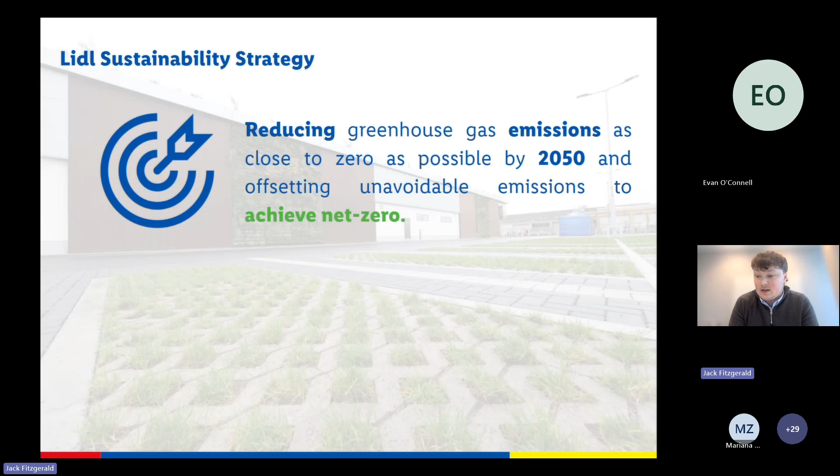Then the key objectives of the project - future-proofing for future EU legislation in terms of the Energy Performance Building Directive and the move towards zero energy buildings. We wanted to use Maynooth again as a test bed here, take the learnings from it and be well equipped for these changes when they come further down the line.

And reducing energy consumption and cost. As a discount retailer, energy consumption costs is always something that's at the front of our mind - how we can make those costs leaner, but keep the stores operating as efficiently as possible. We wanted to use Maynooth here; again, we made updates to building services to see what we could take and roll out across the wider network.

Awareness is obviously going to be a key objective of this project - awareness through project partners such as the Irish Green Building Council and also the BRE group. We want to continue to reinforce Lidl's position as a market leader when it comes to sustainability, and again this is going to be done through our project partners here.

And then education. Obviously we wanted to use Maynooth as also a learning base as well, be that for suppliers, other contractors, developers, and even the wider public, which I'll get into a bit more later on, which we've done through our community garden, which gives details on the building that you can see as soon as you walk onto the site.

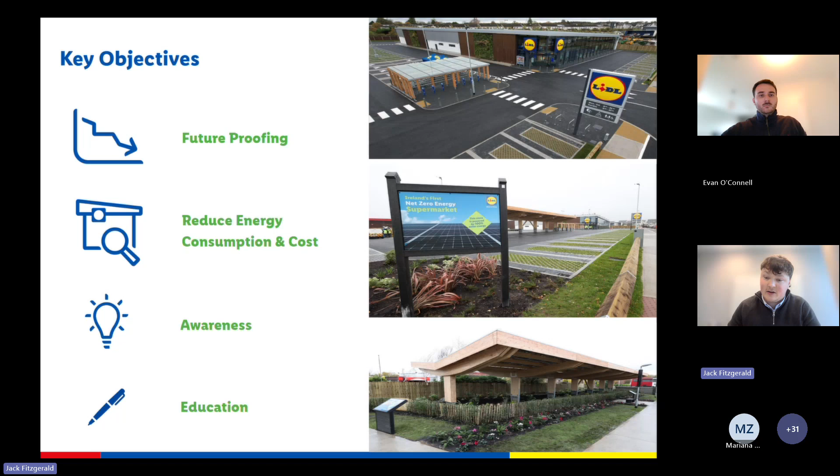Okay, so a bit more background on the project. We started this project in roughly 2020, so almost 6 years ago now. At the time, there was no definition for net zero energy construction in Ireland. There had been a number of definitions over the years through the likes of the World Green Building Council, but these allowed for a very wide range of offsets, including the purchase of green electricity.

So with that in mind, we decided to partner up with the Irish Green Building Council to get their third-party validation and get them to define the scope for us going forward. The definition we came to in agreement with them was all operational and embodied carbon, and offsets only for embodied carbon must be genuine offsets.

So the operational carbon is the carbon to run the building day to day, such as your refrigeration, your lighting, etc. The embodied carbon is the carbon produced to realise the store, through your building materials and methods. Then the offsets - like I said, there was a wide range of offsets through the World Green Building Council and other definitions over the years.

In Maynooth, we wanted to keep the offsets genuine. So what we've done is actually create carbon insets - we've retrofitted a store near Maynooth with PV as well, to offset the remainder of the embodied carbon that we couldn't offset with the store build itself.

So the structure then, the external team. Lidl Ireland has been the primary driver of this. We were closely affiliated with our own Lidl International and Schwarz Group parent company as well - they're obviously project stakeholders here also.

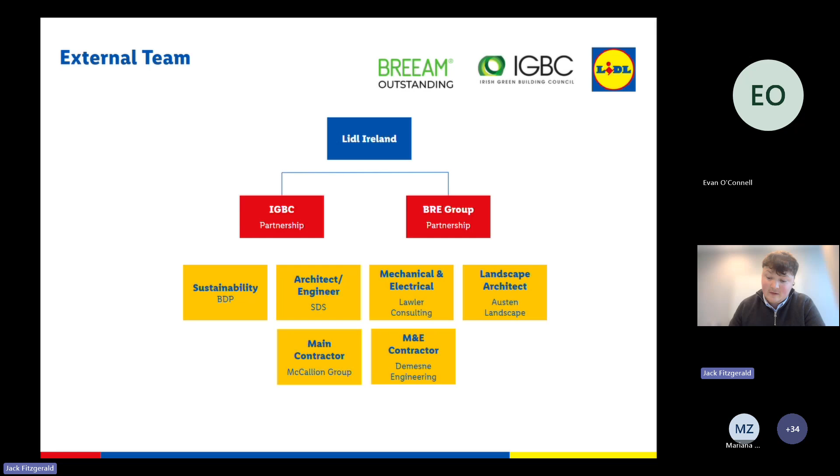So I'll start off with the embodied carbon. When we started this project, we had to build a baseline and understand exactly what our embodied carbon benchmark was for a standard store. So we had a life cycle assessment carried out on a standard store, and what we found is that a typical Lidl store was already performing very well in terms of embodied carbon.

So I've listed the standards set by the UK Net Zero Carbon Buildings Standard on the right hand side. The reason I'm referencing these is because, similar to construction regulations, the Irish standards, when released, are predicted to follow the UK Net Zero Carbon Building Standards very closely for the commercial and retail sectors. So we found that Lidl was already outperforming the 2030 target there at 535 - we were closer to 440 kilograms of CO2.

So with the changes we were able to implement in Maynooth, we brought this closer to the 2040 target - we're within about 320 to 330 kilograms of CO2 in Maynooth at the moment. So again, we were able to make a significant decrease there in the embodied carbon of 26%. But again, it just shows we're already outperforming the standards that were already set.

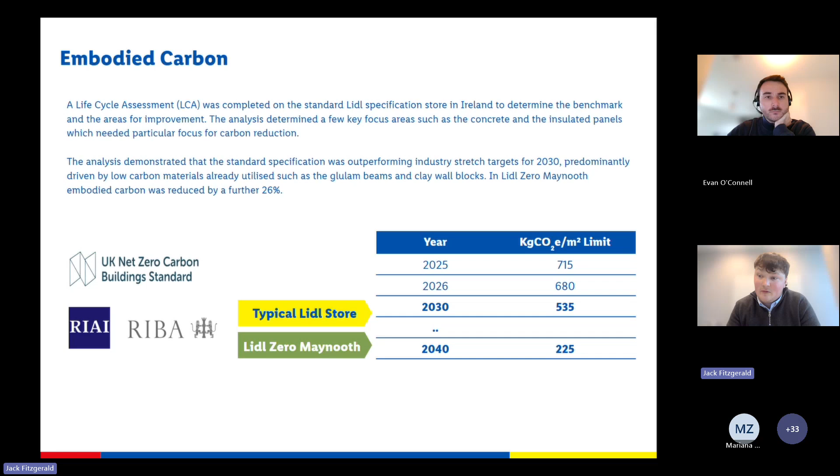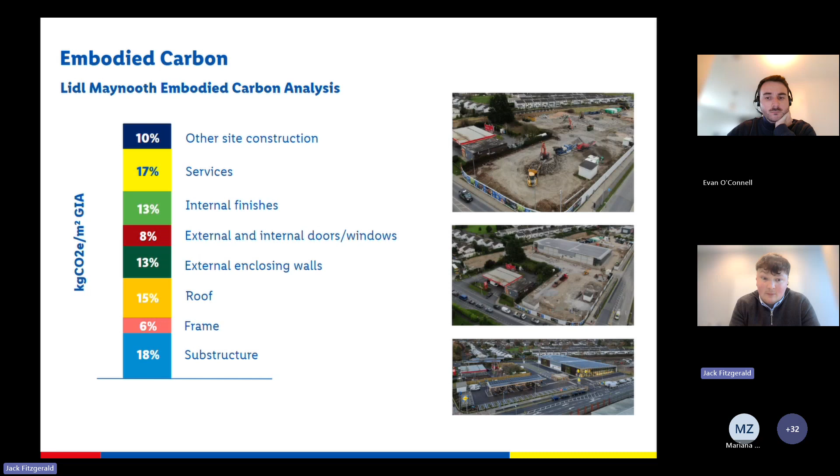We want to continue to focus on being better and reducing this further. As part of the life cycle analysis, we had to analyse every element of the building structure. So we started off looking at the substructure and the percentage of embodied carbon taken up in the store, going through the frame and the roof. We were able to pick out some of the bigger hitters and identify key areas we could go after.

Looking at this key element breakdown, the roof panel included in the standard store was a PIR insulation panel. The manufacturing process for these is very carbon intensive. It includes a couple of sheets of steel manufactured either side of the PIR insulation. So we identified that as an area we could focus in on.

Through our suppliers on the project, Kingspan, we were able to implement the lower embodied carbon roof panel range. At the time this wasn't something that had been released to the market, and they also wanted to use Lidl as a test bed for themselves. So we got their early buy-in and saw significant savings of up to 21% in the roof panel and also the wall panels, which were the same type of PIR insulated panel.

For the building structure, we had the Poroton blocks, a clay block we use in our standard stores with very high insulating qualities and quite low carbon output compared to concrete blocks or steel frame. We looked at all these options to see if any change should be made, but found they were already outperforming the standards by using the Poroton blocks, so we continued to use them here.

What we did do in this case was increase the thickness of them. Typically we use a 365mm block; we increased this to 425mm. The reason being to reduce heat losses through the building, because we want to retain as much energy within the building as possible, so that the building services don't need to work as hard going forward.

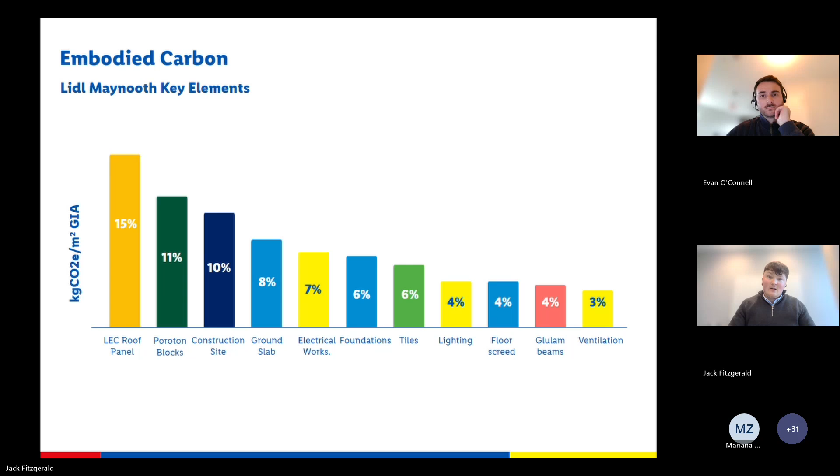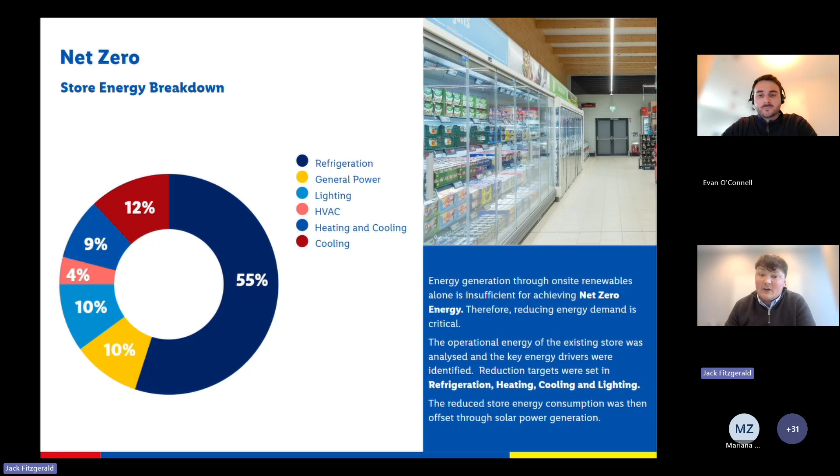Having looked at the embodied carbon, next up was the operational requirements for the store. Similar to the embodied carbon strategy, we had to build an operational strategy - establishing your benchmark and working your way down to see what improvements can be made. We picked a couple of standard stores and analysed them, finding that refrigeration was the biggest hitter in terms of consumption, alongside general power, lighting, HVAC, heating and cooling. These were all items we looked at to see what changes could make them run more efficiently and reduce consumption in the store.

So through that, we developed this energy waterfall, or strategy. We looked at the items we could reduce the energy store usage from, and we found that we were able to make a reduction only to a certain point. That wasn't going to get you to net zero. And this is where your renewables then come into effect.

In a standard store, we typically include 200 kilowatt of PV solar panels on the roof. In Maynooth, we've included 575 through the roof and the car park. So we over doubled the size of the PV array here in order to get more solar usage in the store and reduce the energy consumption.

We also included a battery in Maynooth, which was first of its kind in terms of a retailer doing this in Ireland. It was the first time we'd done it throughout our stores. This was able to make use of the high production times for the PV - it can go to the battery, be stored, and then released at nighttime to make use of the cheaper nighttime rates.

Finally, something we'd never had experience achieving before: we found we could get so far with renewables and reducing energy consumption, but we still needed to export the remainder to the grid at high peak times. So we had to work with the ESB and the DSO department within ESB in order to obtain an export license. This was really the key element to truly get us to net zero, because there was only so far we could get with the building design. We're exporting to the grid at our peak times, and that's allowing us to achieve net zero.

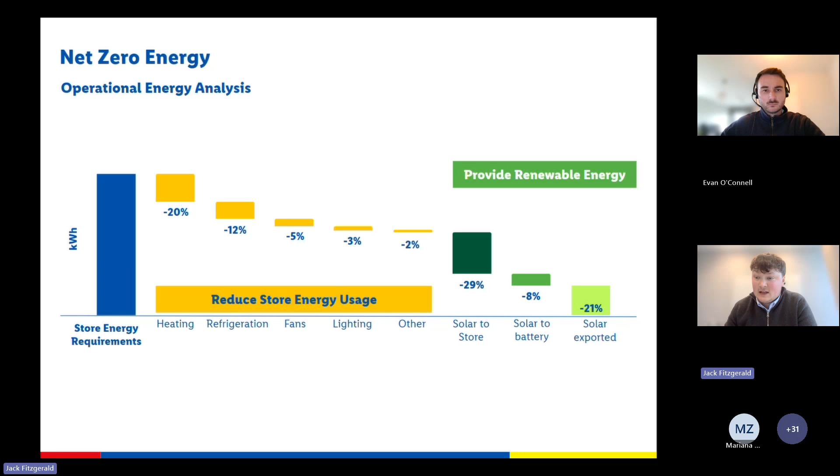So maybe just to give you some headline facts. In Maynooth, we've saved what is the equivalent of 40 Irish houses in terms of energy saving annually. Also, 142 tonnes of operational carbon have been saved versus our standard store, which is equivalent to 1,500 flights from Ireland to Spain annually. If you think of the cost of fuel at the moment, there are obviously significant savings there.

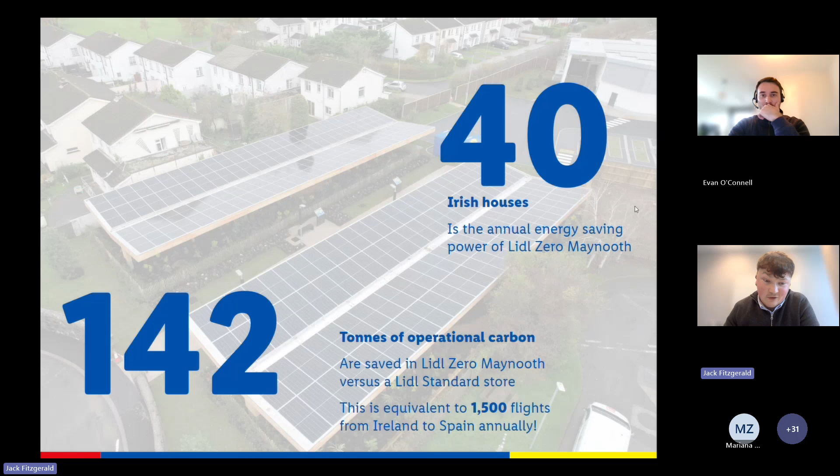Just to put it into perspective for the everyday customer - some more headline figures. Embodied carbon, through the change in our building materials and the likes of lower embodied range from Kingspan, and from changing our concrete, we were able to reduce that by 26%. The energy consumption reduced by 30% through changing our refrigeration and our HVAC, our heat and ventilation cooling systems.

The operational expenditure, due to the increased use of PV solar, the energy consumption reduced, and the operational expenditure has reduced significantly by 82%. But all this comes at a cost. Maynooth is a one-off, a landmark store - a test bed project that we could take our learnings from. There was a significant capital expenditure investment here of 20%. But we knew this coming into the project and had it all taken into account. We'd done thorough evaluations based on it, so it was something we were aware of coming into it.

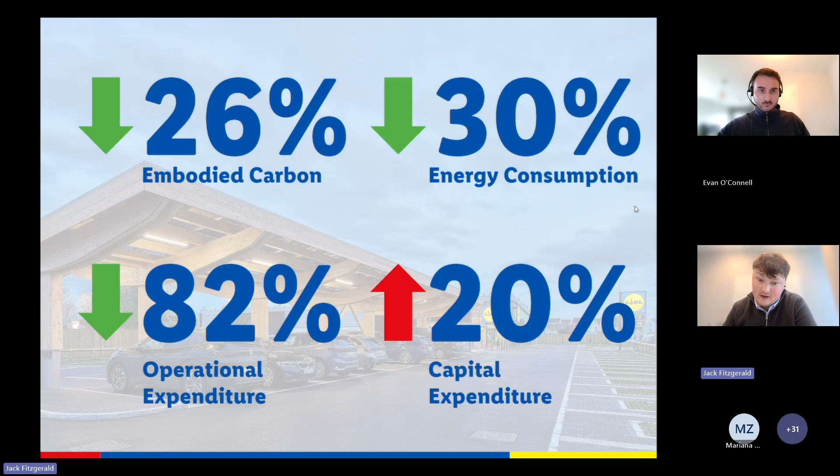Just a further bit then on BREEAM certification. Third party validation was absolutely crucial to the integrity of this project. We had the Irish Green Building Council make the definition for us, helping define what the scope of the project would be. We also needed the BRE group to help guide us on how we could achieve BREEAM outstanding certification. So what we've done in this case is targeted Maynooth for the outstanding rating, the highest one you can possibly achieve.

The reason behind the Maynooth store is, I suppose, it was the best one in order to achieve the BREEAM outstanding certification. It was a knock and rebuild store, an old store that was in bad disrepair. The original store opened on the 5th of November 2005, and the new store opened almost 20 years after, on the 6th of November 2025, so the old store was in place for approximately 19 years.

With BREEAM certification, there's a large amount of credits available for the transport section. Maynooth is a commuter town on the Dublin commuter belt, with a number of services running through it, trains and buses. Because of that, we were able to identify Maynooth as the best candidate in order to achieve BREEAM outstanding and also continue to achieve net zero, thanks to the commuter belt and public transport links.

The programme as well is what makes this project even more unique, I suppose, because of how aggressive the timeline was in order to achieve all this. Maynooth's programme was 37 weeks from start to finish. The store started on the 10th of February and opened on the 6th of November 2025, the same year.

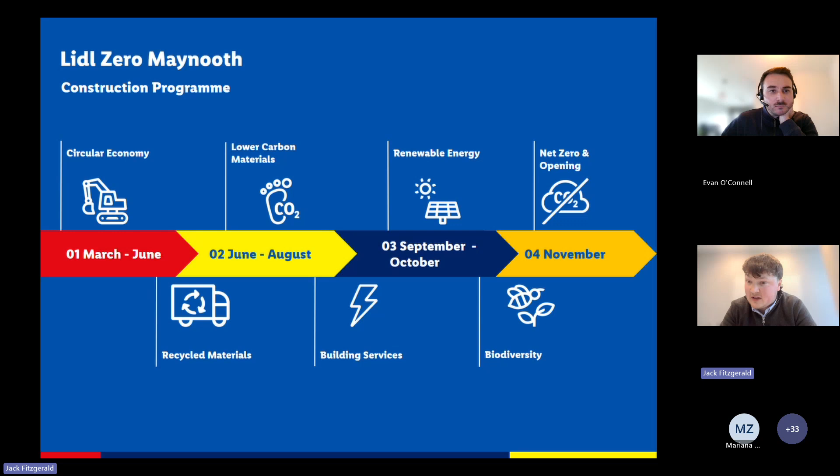Biodiversity and landscaping were also a big focus in this project, which I'll touch on more later. You'll see things like the community garden, the living wall, and the green planter boxes on the roof, all feeding into our biodiversity targets for this store. That all resulted in the November 6th opening, achieving net zero and opening in November.

A bit more on the energy generation: we include 200 kilowatts of solar PV array on our roofs as standard. What you see on the roof in that photo is approximately 60% of what's actually installed. We increased the roof so there's no room for any more PV on it, accounting for walkways and required distances from the edges, etc. We found that could only get us so far in terms of actually achieving net zero, so we needed to include further PV.

What we were able to do in Maynooth was include timber canopies throughout the car park, as you can see in the photo on top. In the photo on the bottom, you'll see two further ones in the background where my cursor is. This was a piece of ancillary land that we purchased for future development at the store.

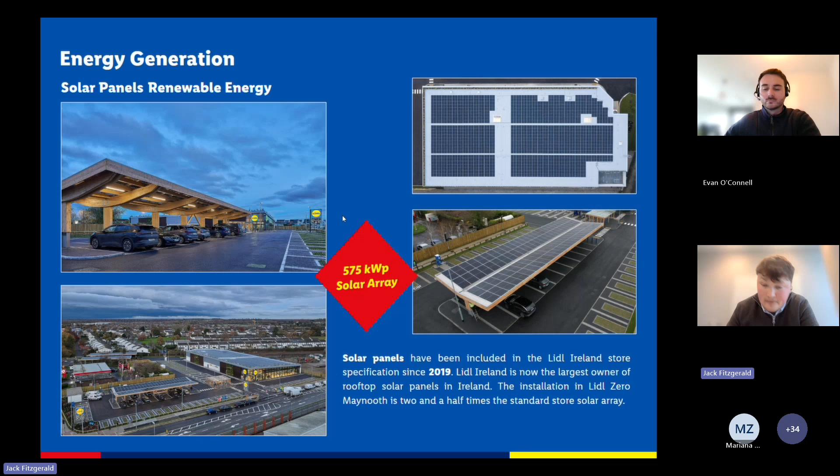What we found, and I suppose what we decided early in the project, was that if we were to put car parking spaces down here, they'd be quite far away from the store entrance. So in order to achieve net zero, we said we'd better utilise this as our community garden area and also utilise it to include additional PV, which allowed us to get over 130 kilowatts of PV into that area alone. So it was very worthwhile there in order to achieve that net zero.

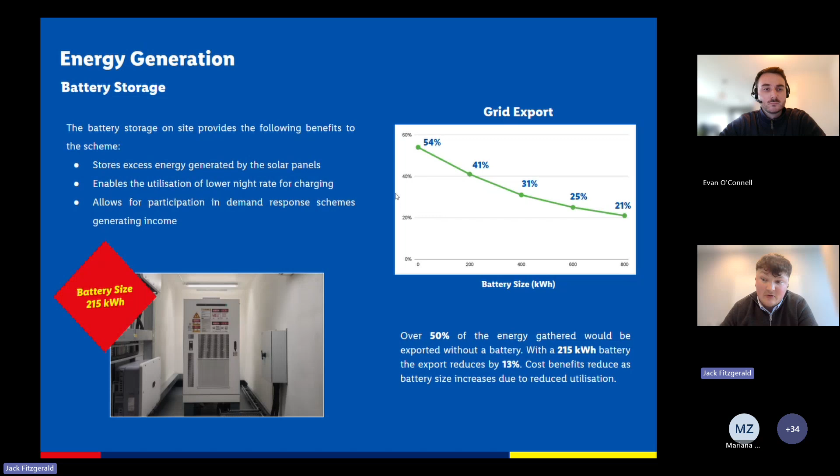And then energy generation, again, back to battery storage. So like I mentioned, this is the first store that we utilised battery storage on. We had other countries within the Lidl group that we were able to lean into and take their expertise on this, and take the learnings from what they've done there. What we did in Maynooth was we installed a 215 kilowatt hour battery. It stores the excess energy generated, and then we're able to use this during peak times and also participate in demand response schemes. So again, reducing the strain on the grid at peak times, so we can actually use the energy stored in our battery to go back into the grid also.

So then maybe a bit more on the low carbon materials, back to circular economy as well. The old store in Maynooth, we were able to pick up, remove and retain all of the concrete, be that pavers, concrete foundations throughout the car park, the footpaths. We were able to retain all of that, and we reused 100% of it in Maynooth. So that was obviously a big one there that we wanted to achieve from the outset.

Our contractor's knock and rebuild program on this would have been a bit longer than what we typically do, the reason being we were segregating all the material, ensuring everything was separated, and making use of those circular economy initiatives here. But it resulted in us being able to reuse 100% of the material, which was our target on the project. The 50% GGBS concrete, like I mentioned, we can see savings there of up to 48%. All the structure you see in the photo below, and then the slab that was eventually poured here also, that was all made using that 50% recycled concrete, so all your columns, beams, ground slabs, etc.

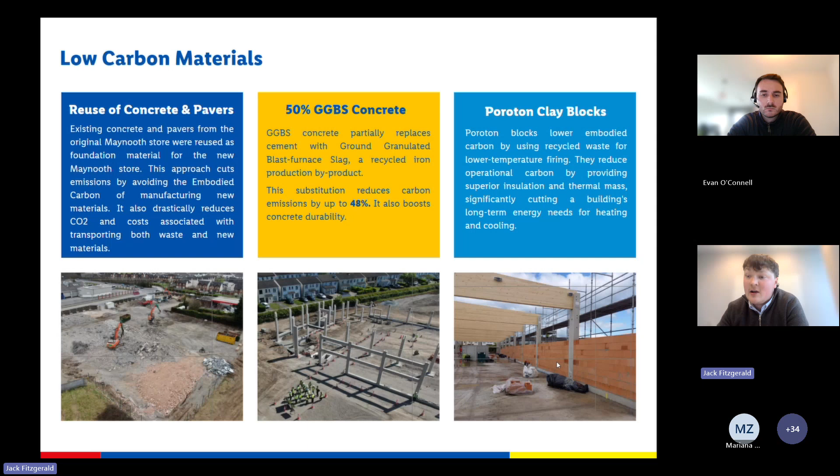And then the Poroton clay blocks - this is the block in question here. It's a clay block, again, that we use in all of our standard stores. We increased the size of it here in order to reduce the losses through the building, the thermal losses through the building.

Circular economy then - I mentioned about the concrete pavers and that. We also wanted to reuse material that we took from the building that couldn't be reused on the site. So we reached out to local schools, local charities and initiatives to see what we could get an agreement with them to use as well. The timber structure, as you can see in the old store here on the right hand side, we stripped, kept it on site, and donated it to local schools. There were 4 schools that we donated garden furniture, insect hotels and bird boxes to - we made over 20 bird boxes and insect hotels. They went out to the likes of the Maynooth Educate Together School, Leixlip Primary School, all schools in the surrounding areas. The RNLI in Donegal - we took the light poles that were on the existing site and donated them to a marina that was being constructed up there at the time. So again, repurpose and reuse up there.

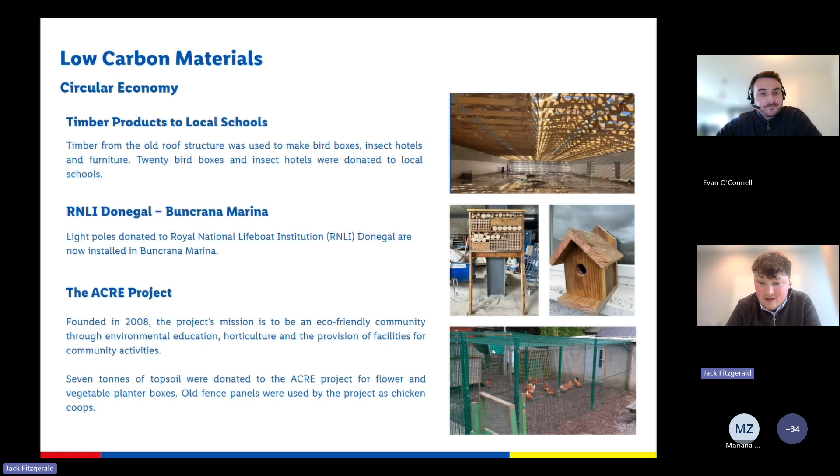And then this project in particular is quite an interesting one. The Acre project is just over the road in Celbridge - it's a men's and women's shed. On the site you see they have vegetable gardens, flower gardens, chicken coops, etc. So what we did was we actually donated 7 tons of topsoil that could be used in the garden areas. We also donated all the old paladin fencing that you see in this photo here - that green fencing was actually surrounding the old Maynooth site. They took it, repurposed it, and made coops to protect the chickens from foxes and whatnot trying to get into them.

Again, low carbon materials, so the glulam beams, like I mentioned, we did review steel structure, precast structure. Was there anything better we could do there? We found that we were already ahead of the standards required with the glulam, so we maintained the structure on this site.

The walls and roof panels, by our partner Kingspan, boasted an 18% lower embodied carbon. And then even towards the end of the project, this was one we hadn't anticipated, but it was relatively new on the market at the time. Because of the traction the project was getting, and how much people knew about what net zero energy in Maynooth was going to become, our suppliers that provided the tarmac reached out to us to say they had this product.

So it's a 70% reclaimed asphalt. The binder layer, the bottom layer and the middle layer of the tarmac are all made using recycled tarmac in this case. It's only the top layer that's used the fresh tarmac. So again, significant savings in carbon there as well, because producing tarmac is obviously very carbon intensive.

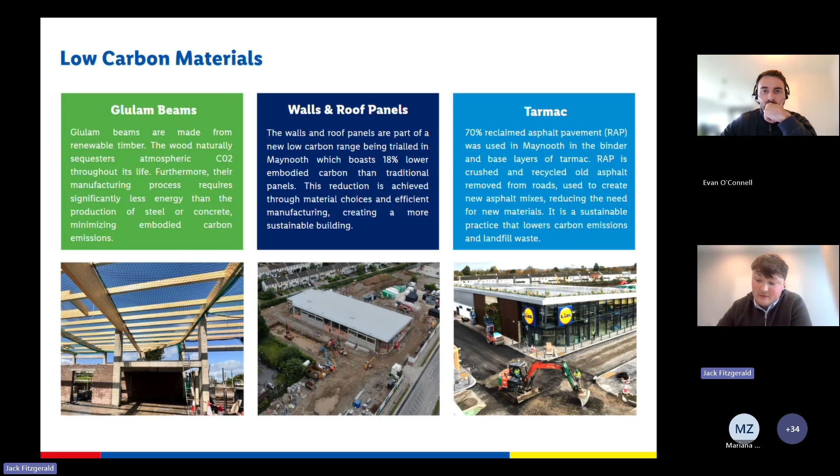Canopies and trolley bays then as well. The glulam that you see in the stores is also throughout the car park, in these new canopy structures. This wasn't something we'd done before, but it's something you'd see a lot more in Lidl stores on the continent, in warmer countries like Spain, France, Italy, Germany. They've all done this before. We were able to lean into their expertise, use their learnings, and also the suppliers they use would also work within Ireland - VHAG in this case.

So they were able to provide this solution for us for the car park canopies. And then also, we have an external trolley bay here - typically a steel structure. We wanted to continue to reinforce that kind of green net zero image when you drive into the store, or when you drive into the car park. So one of the first things you see when you drive in is the trolley bay canopy, and it is a timber structure also, the exact same as the canopies.

And then even down as far as the fittings around the site, the bollards - these are made from recycled plastic. The recycled plastic actually comes from Schwarz Group, our parent company. So these may have come from a Lidl anywhere in the Lidl group at some stage, been repurposed, made into bollards, and then they ended up in Maynooth. So when buying the final pieces of the store, to be able to include those was a nice element.

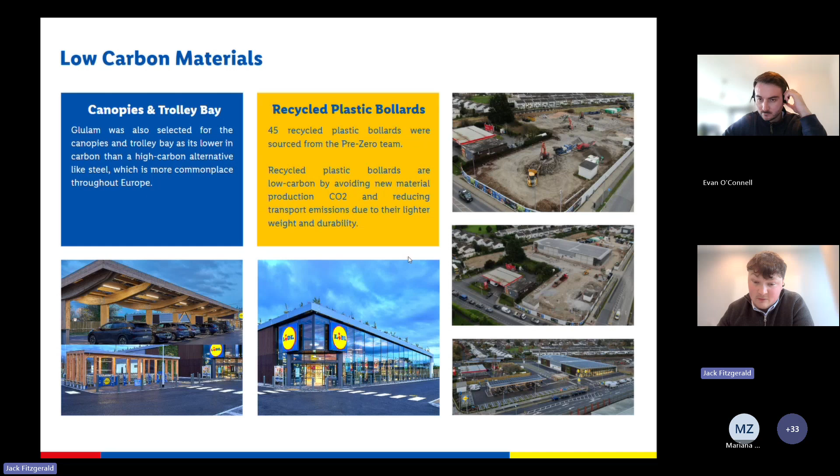So then sustainability features. Again, we want to continue to reinforce the green image, the image of net zero, and we did that through further sustainability and biodiversity features here also. So the living wall - we installed a living wall in Maynooth, in this case there's two sections of it. We opened in November, which isn't a great time of year for plants growing, so this was growing in the greenhouse since the month of May, so that when we came out to site, we actually had this kind of lush green wall you see in front of you here.

Again, to bring it back to recycling and reuse, it's fed by an irrigation system that's linked back to a rainwater harvesting system from the roof. So any water that falls from rain comes into the roof, is collected in a tray, and is fed back into the green wall and also into the community garden in the next photo.

So the community garden - we wanted to create an area for biodiversity, for your insects, your plants, your animals. Inside we have insect log piles, bird boxes, insect hotels. There's any number of different features in here, even down to the type of sand and stones we put in. We had a landscape architect on board that was able to advise on the most suitable for these in order for biodiversity to thrive.

And again, any number of the native Irish flowers, native Irish hedging as well to be included.

Just one there as well, then the sustainable mobility hub. I mentioned earlier about the credits available for mobility in BREEAM. So not just about your cars, your trains and whatever, we also need to include sustainable mobility initiatives in Maynooth also. So in a standard store, we typically include one charger for two electric vehicle spaces. In Maynooth, we have 6 electric vehicle spaces. We also have these bike and scooter chargers.

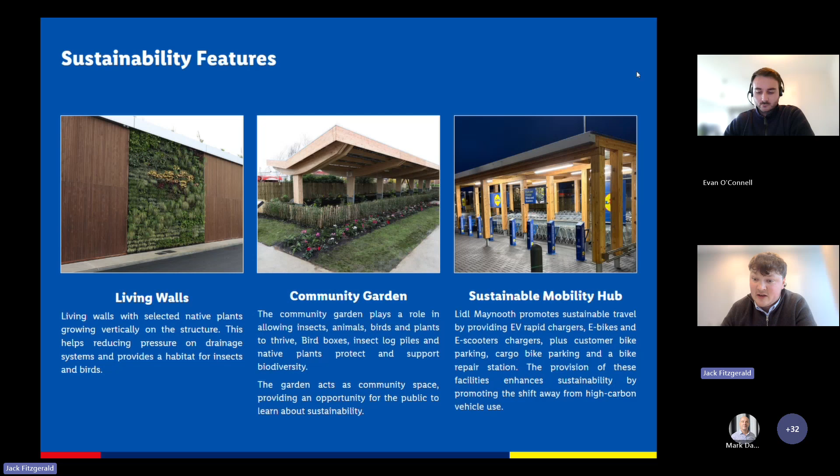Green car parking spaces, again, this was something new and very unique in what we included in Maynooth. So in the planning conditions, there was a condition around sustainable drainage, which isn't uncommon these days. It's very common site to site across all different councils in the country at this stage. We have done permeable drainage previously, we've done permeable tarmac previously, but we wanted to do something different here as well, again, to give you that impact when you drive in.

So again, we're able to lean into expertise from other countries like France and Italy, who've done this previously, and we're able to develop this green car parking space. So what it is, is a paved area surrounded by what we have here. They're almost like individual flower pots within a paving stone. These are all within the car parking space around the perimeter of the site as well.

They form, in the main part of the site, they're all feeding into an attenuation tank. And then along the side, they're all feeding into the gullies directly behind them. You can see a couple of manholes. So it's all linked back to the drainage system within the site. So again, it's just another sustainability initiative included here.

Along with the green wall, we also included these planter boxes on the roof. They're not weeds, they are deliberate. They're there just for that impact when you drive into the store. What's also notable is they're fed by the same rainwater irrigation system I mentioned earlier.

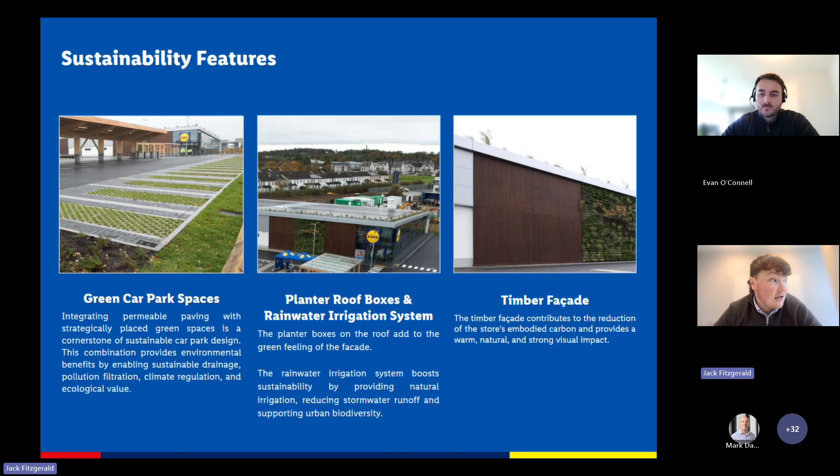And then the timber facade. So the kind of final piece of the store when you drive into the site - we have the green walls, obviously the plants on the roof that I spoke about. We wanted to look at the cladding as well that wasn't just our standard cladding. We wanted to put in something to further reinforce that image, like I said. So we looked at timber cladding here, in this case from an Irish supplier.

So again, just maybe a couple of credits that we were given in the lead up to it. Obviously, the Irish Green Building Council were a partner in the project with us, and you can see maybe a testimonial from there as well. And then also we had Minister Darragh O'Brien there for a sod turning event during the summer, and he was also there again for the opening event. So like I said, the third party validation was crucial for the validity of this project.

Again, we had Irish Green Building Council on board from the start. They helped us drive the ambition, the objective of the project. But then again, to be able to get governmental buy-in and be able to use this project as a test bed for the wider group going forward - it was great to get the recognition here in that regard.

You can see then just maybe some final photos of the project. So again, the likes here at the front facade, you can see the green wall, all the planter boxes in the store as well. The glulam beams, the same glulam throughout the car park. Just an aerial shot then showing the car park, the green car parking spaces you can see really standing out here versus your standard spaces. And then just a couple of further shots throughout the store.

It's been received well in the media throughout opening. We were honoured to accept an award there, the PMI Awards, earlier in the year. We've since won 2 National Property Awards, and were shortlisted in the Irish Construction Excellence Awards in May as well. So it is getting the recognition I think it deserves.

It was a very ambitious project, a very unique project. It took a lot of effort from a lot of different stakeholders. I was the project manager to finish it, but I was far from the project manager to start it. It changed hands a lot over the years - I was only involved a short time, there's been a lot of heads involved in it. It's one we're very proud of, and we're continuing to monitor now for the year ahead.